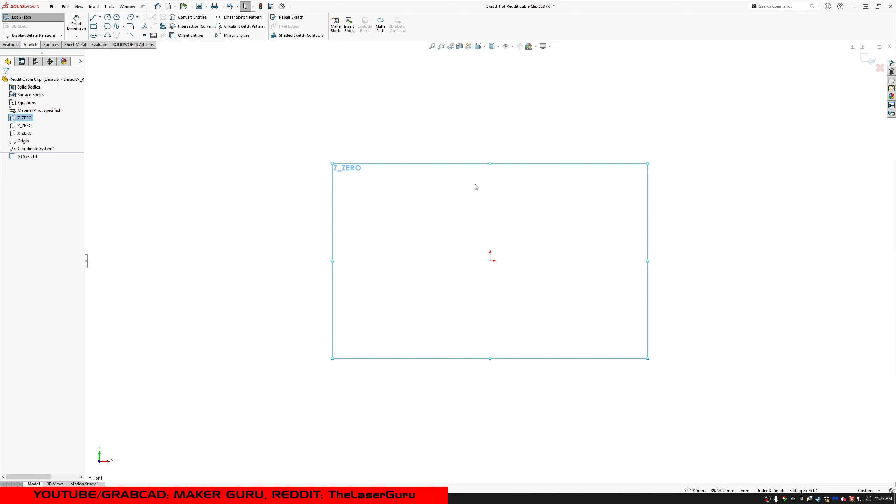I'm going to start over here, and this is basically a slot. Let me draw on my Z-plane. This is a custom template, so normally this has some other name - I think it's like top plane or something. It's the first plane right below material, and if you draw on this one for 3D printing, it's a good idea to make this plane the bottom of your part. That way when you import it into your slicing software, you don't have to rotate it around or anything, it's already in the correct orientation.

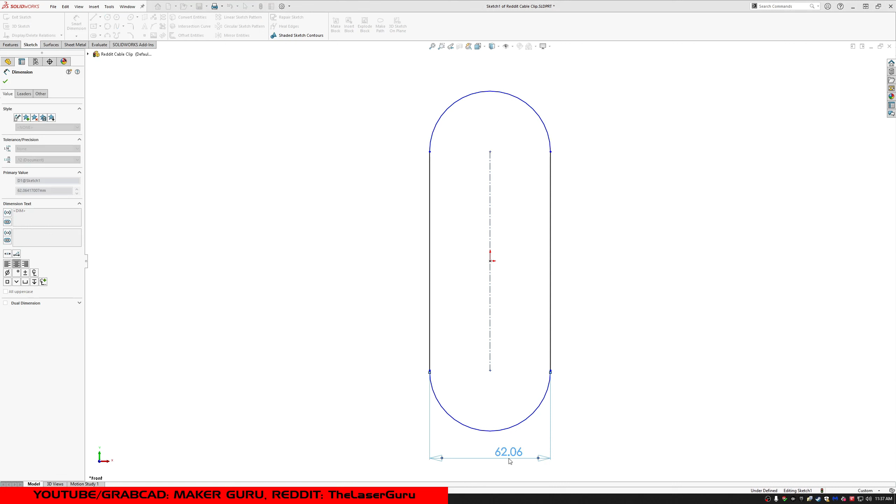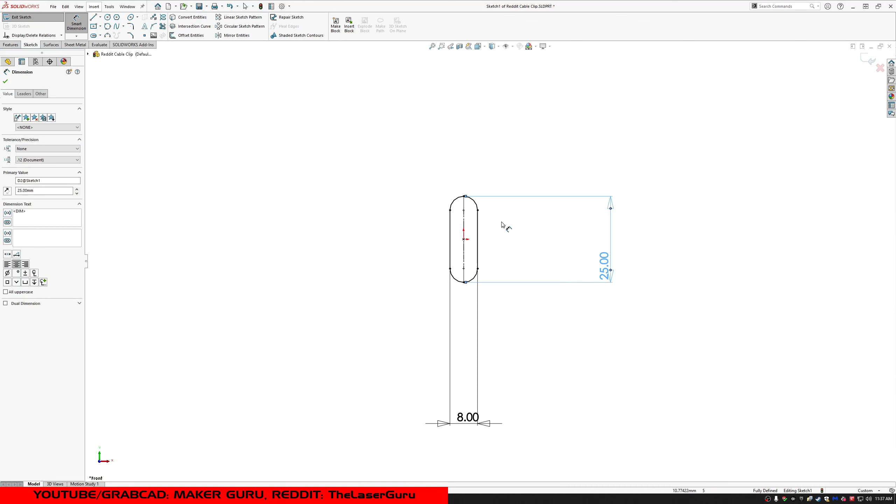So I made a slot, made it vertical. I'm going to say it's about 8 millimeters wide, and I'm just going to go there to there. I know there's another way to do it, but I prefer to have a construction line. I'm going to say it's about 20 millimeters long... 25. Looks about right. Alright, so what do I do with this?

I'm going to extrude it, and go up half of that, so 4. Then I'm going to take a fillet - also going to make that 4. I'm just going to hit this face. So already, like that, I've got my basic shape.

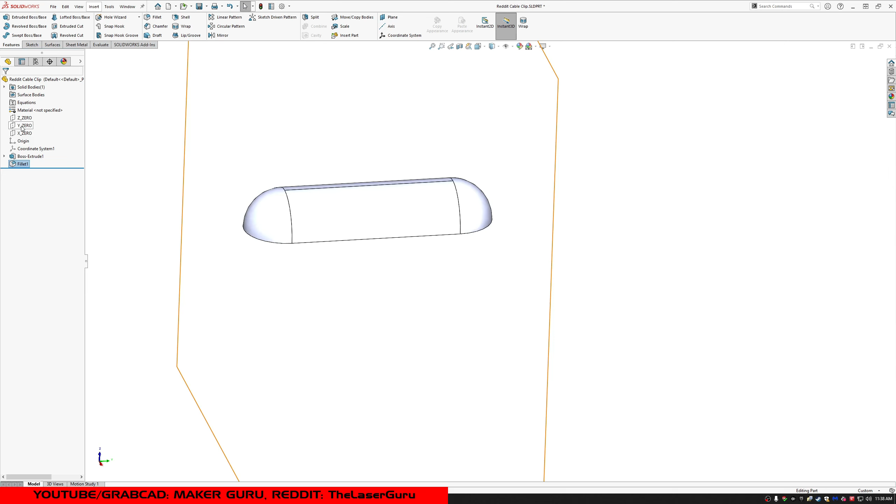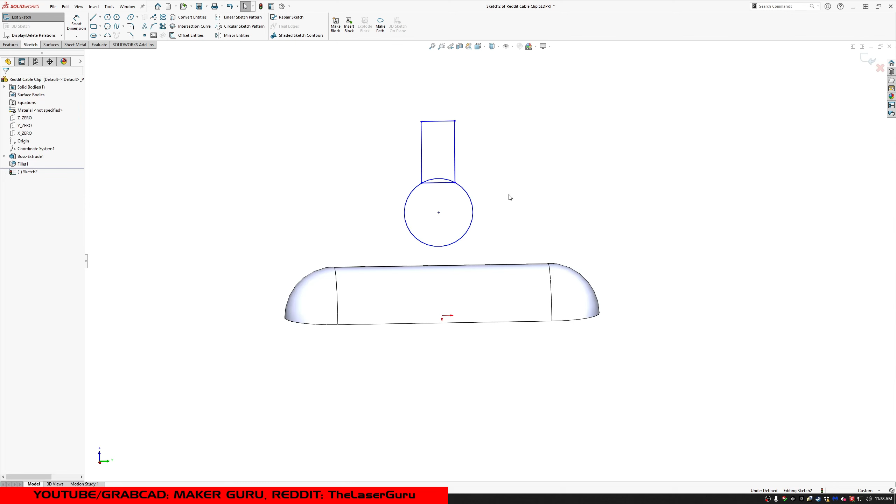Then I need some holes in the sides for the cables to come into. I'm going to draw on this plane, and I'm going to have a circle, and then I'm going to kind of have an up bit. Make that coincident. If I had to guess, it looks like maybe a 3 millimeter circle, maybe. We'll see. Yeah, I think 3 is about right.

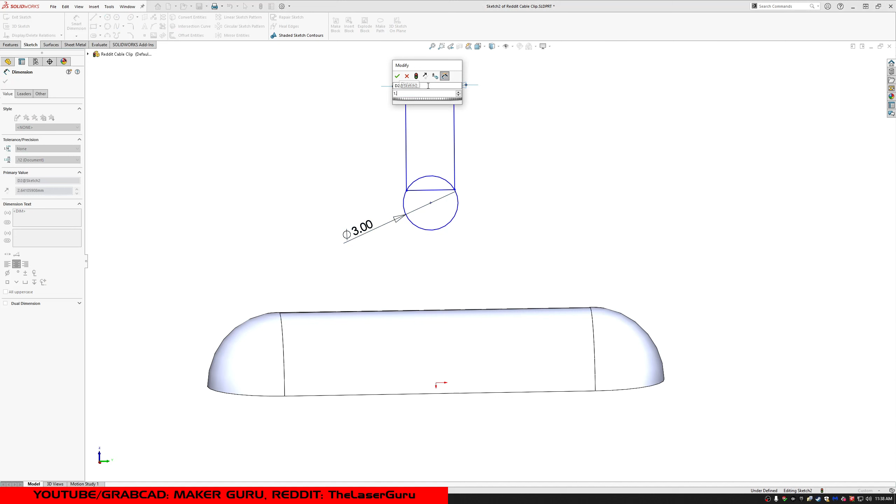And then maybe 1.75 up here. That's about sort of it. So I'm going to make that for construction. I'm going to trim that.

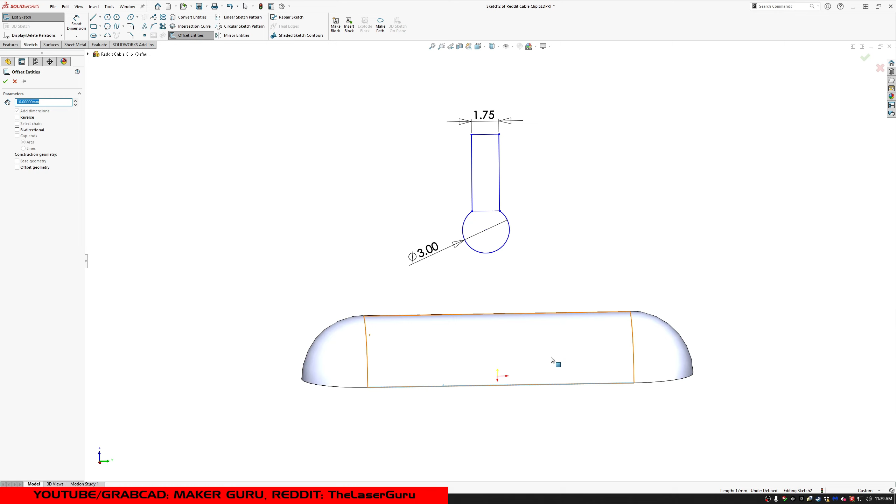I'm going to grab this line and say offset. Basically I want to have a little bit of meat below this, because if I just bring this circle too close, then when it prints it's going to end up being 2 pieces, or it's going to be really fragile. My normal rule of thumb for 3D printing is that I want at very least 1.2 millimeters, ideally 2.4, and if I want it to not flex easily, at least 3.2. But I don't have a whole lot of room to work with here - I've got a total of 4 millimeters, so I can't have 3.2 millimeter spacing. So I'm going to go to my absolute minimum.

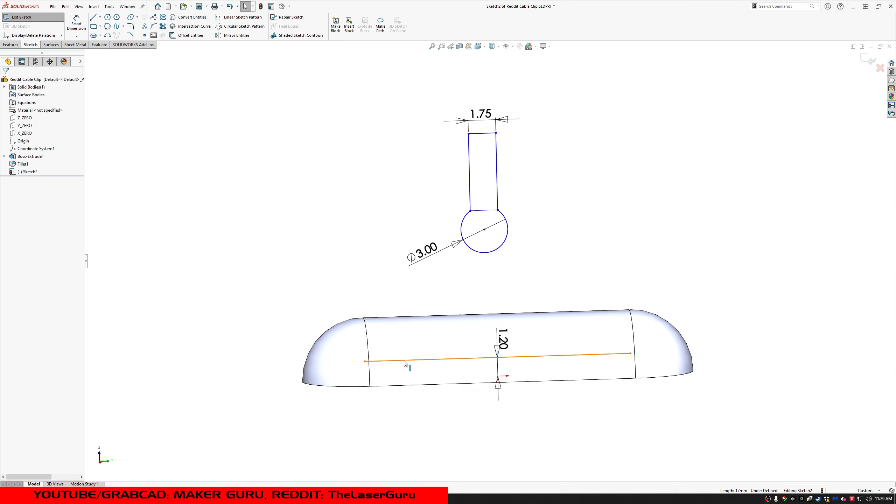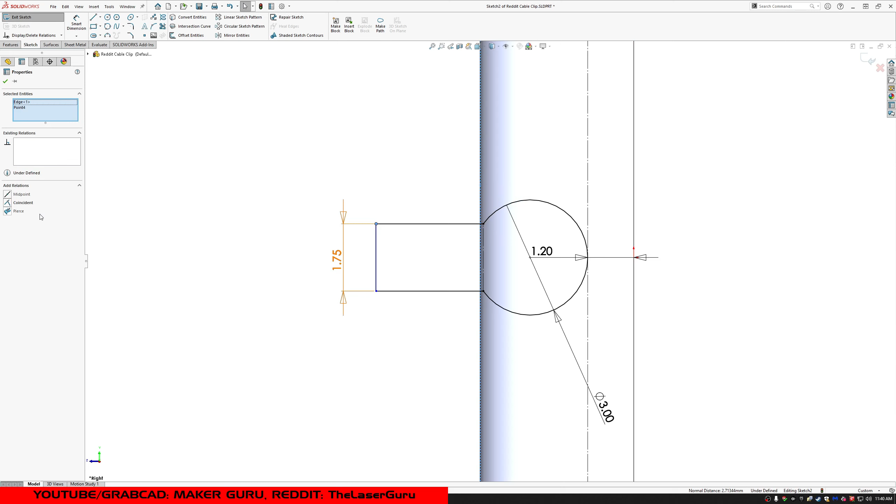I'm going to do a for-construction and a tangent, and I'm going to grab this plane and this point, make it coincident. Now the problem is, if I go normal to this, I need to have more here, and this is going to be coincident with that. So let's see - if I bring it down to 2.5, and then 1.5. That's a little bit better.

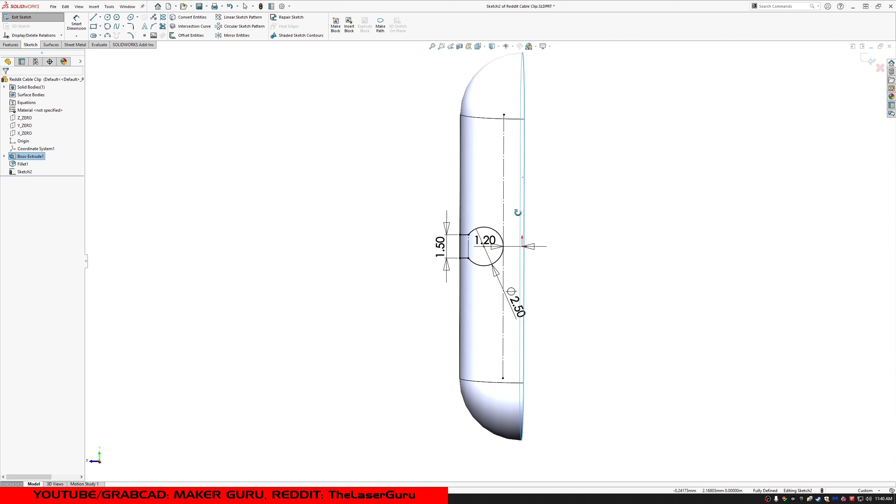If I had to have like a 3.5, then I'd have to change the dimensions around, or I could just draw in here, copy it, and extrude it out. But I'm trying to get it as close to the source as possible, and it doesn't look like they did that.

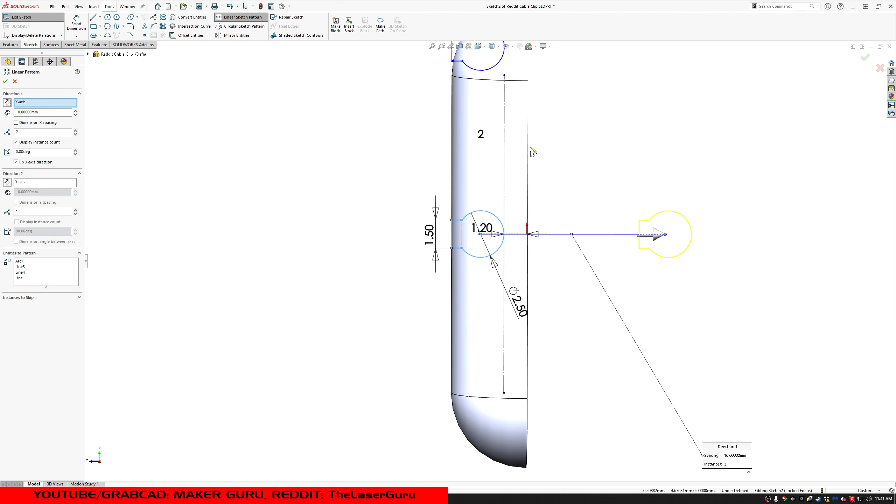So I've got this. I'm going to select my chain and do a linear sketch pattern going that way. Then I'm going to select it again, linear sketch pattern going that other way. I'm going to go from here to here, and get that out of the way. Grab this and this midpoint for construction, so then I can drag in like that, and that's like right at the edge.

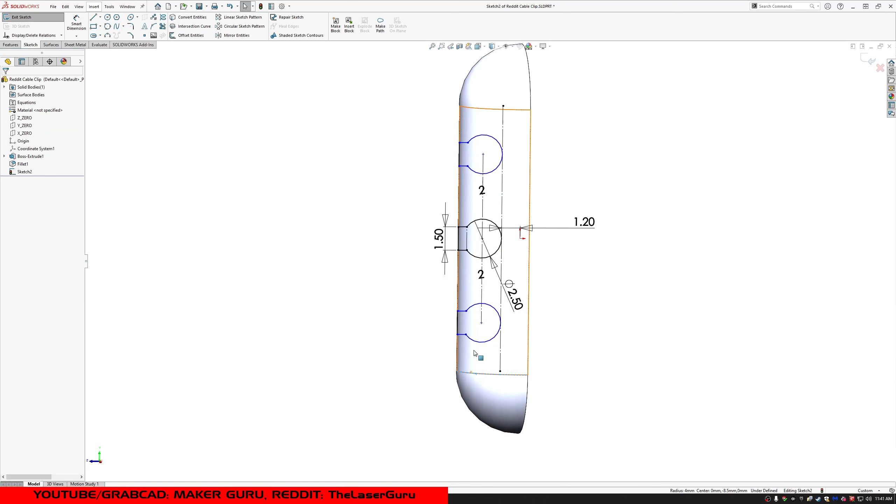So I'm going to go like that. Then I'll do extrude cut through all both. And I've got that - kind of sort of looks like that. I'm going to skip this middle one because it's basically the same as this one - just instead of having the center one, I don't have the center one basically.

This one over here is, again, basically the same thing, except instead of starting with a slot, they just started with a circle. They did the same extrude up, they did the same fillet, they did the same cut through here - they just didn't have these two cuts. So this one is the same as this one is the same as this one, and this one is done.